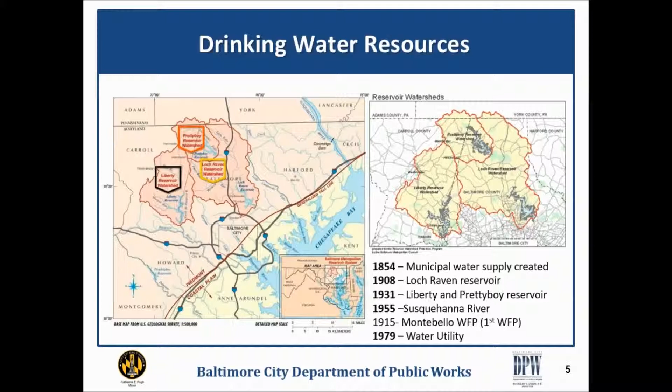For our wastewater collection system, just like in the drinking water, our service area extends out into the county. We have 2 wastewater treatment plants, both located right on the water's edge, so we are rather mindful of sea level rise and inundation from tidal surges. The 2 wastewater treatment plants are 2 of the largest in the state.

Just like on the drinking water side, the management of wastewater has been going on for over 100 years in the city. A major part of the collection system was constructed in the early 1900s, and the bulk of that system was finished in the 1950s. So a lot of the pipe material used is already getting past its projected life cycle.

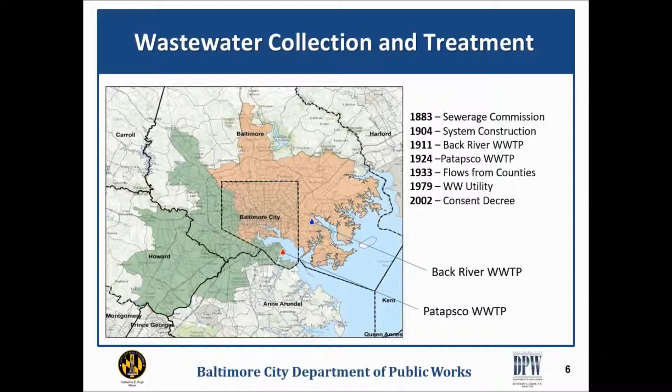Just like the water utility, the wastewater utility was created in 1979, and in 2002 Baltimore City was one of the first separated systems to get a consent decree related to sanitary sewer overflows. Those sanitary sewer overflows were a result of wet weather conditions when inflow and infiltration into the pipes became too much, resulting in an overflow from the system, causing a potential risk to public health and safety.

Then on the stormwater side, we as the city are only responsible for the stormwater system that is within the city boundaries.

However, we share watersheds with our surrounding counties. And it gets a little bit strange because then our regulations, in the form of an MS4 permit—MS4 standing for Municipal Separate Storm Sewer System—are set up by geopolitical boundaries, but the watersheds don't work that way. So we have to do a lot of our planning in concert with our surrounding counties to make sure we're going to get to an ultimate goal of water improvement.

The first MS4 permit was in the mid-90s, and then around 2008, and then going into 2010, we were looking at the Chesapeake Bay TMDL as part of a presidential executive order. This TMDL was really focused on nutrients and sediment to improve the quality of water in the Chesapeake Bay. Why I point out 2010 is that was the year Maryland put out their Phase 2 TMDL implementation plan, and that impacted the MS4 permit significantly. The regulations ramped up very much for regulated stormwater.

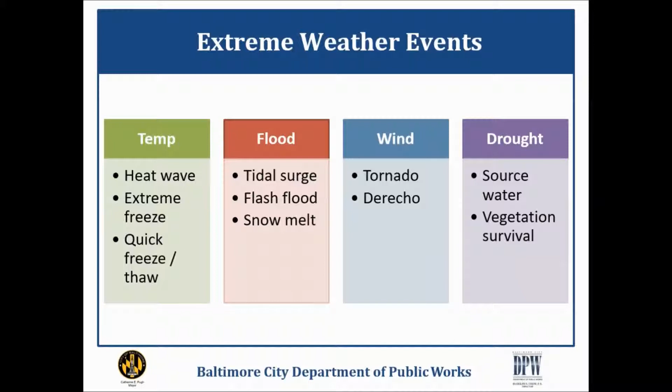So let's talk about floods. The city does have a flood alert system, and those are all the gauges shown here on the map. Our system is an online, real-time system. We're also able to tie into USGS gauges and gauges maintained by NOAA. The systems include both stream level gauges as well as rain gauges.

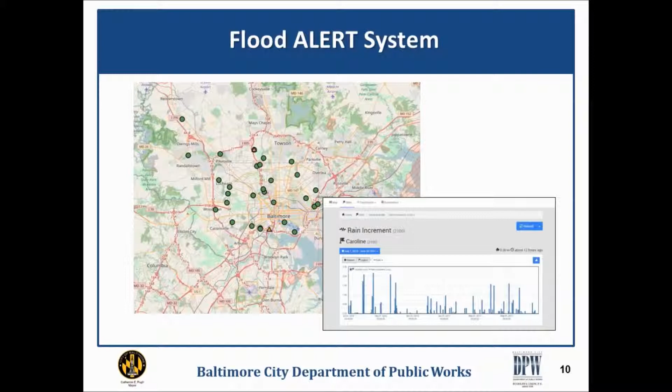Over the years we've had this, we've started to notice variation even within the confines of the city in what a typical rainstorm can look like. You can have half an inch at this location and 2 inches up here. So it's a good thing to have so many gauges and see that variation, rather than depending on just one national gauge, to get an idea of what the rainstorms and cells may be doing during a short period.

So these are some of the typical effects of storm events, and this isn't just for Baltimore City - I'm sure everyone has something similar. I think I saw some for Miami earlier. It obviously affects a lot of our transportation. The middle picture here is our I-83, the Jones Falls Expressway, and when you reduce the number of lanes that can be used, an expressway no longer has any meaning.

But we also see the potential for flooding over bridges, and sometimes - this photo on the right - this is a drift catcher. One of our major streams is the Jones Falls, and for a large portion of the city it's an open channel, then it comes into a tunnel as you get into the downtown area. This drift catcher, which is nothing but a large set of concrete columns, is set upstream of the tunnel so you can catch most of the large driftwood before it goes into the tunnel, where it would be harder to displace and unclog.

Look real close right here - to give you a sense of scale, this is a large dumpster. This dumpster flowed into the Jones Falls during a major July storm, and along with all this debris, it came up against the drift catcher and started to create a dam, which then builds up ahead. We've been mindful and conscious of trying to clean up this drift catcher on a regular basis, because if not, we've experienced as much as a 6-foot difference in the Jones Falls just because of this damming effect.

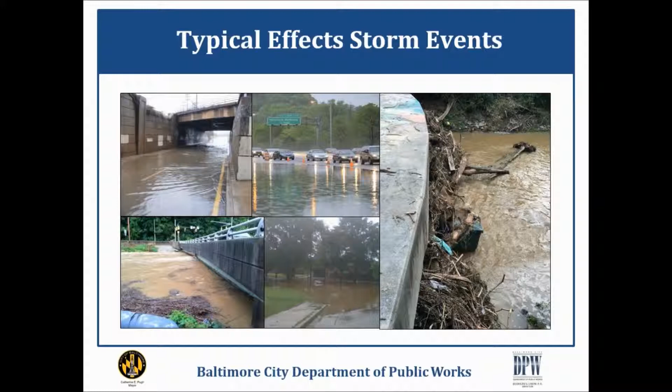And while we have had some evacuations, this was one of the largest ones. We had to evacuate 23 people, but more importantly, this was out of a public housing unit.

So talking about the storm, sometimes when we're looking at models and what we need to do, we will use that standard design storm of a 24-hour storm. And if you look at some of the storm events in the last 3 years that we've had, at the end of the 24 hours, they've only resulted in maybe 1.5 to 2 inches. Looking at it, it may only be a 1 to 2 year storm.

But when you take a closer look and see how the storm is behaving within the first 30 minutes, you'll see that it is actually more intense than even a 100-year storm. This particular one right here was on July 30th, 2016.

If that date seems remarkable to anyone, it was the date that a neighboring community of ours, Ellicott City, made national news because they received 6 inches of rain in 2 hours. That's that same storm. We were fortunate enough to only end up having 2.5 inches, but you could see that same intensity was there in the first 30 minutes. And when we look at roadway flooding, it's that intensity in the first 30 minutes that can make a significant difference related to public safety.

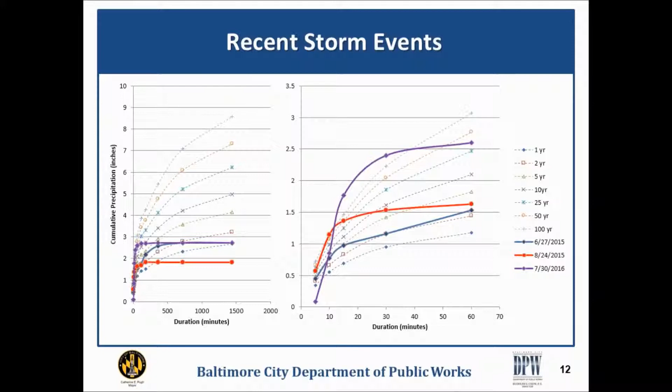The collapse had at first been seen as a small sinkhole that had gone all the way down. We were able to stabilize it and backfill it enough until we were able to get the materials mobilized to make a permanent fix.

Then came a certain summer storm. It wasn't that remarkable, about 2.5 inches in 24 hours. But it carried enough energy so that all that water coming down that 10-foot tunnel pushed out any of the debris that was in it and carried everything with it. And so this large collapse from a 4-lane road happened within 2 hours.

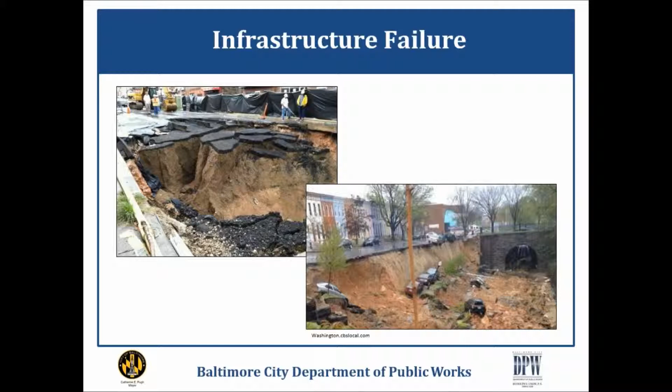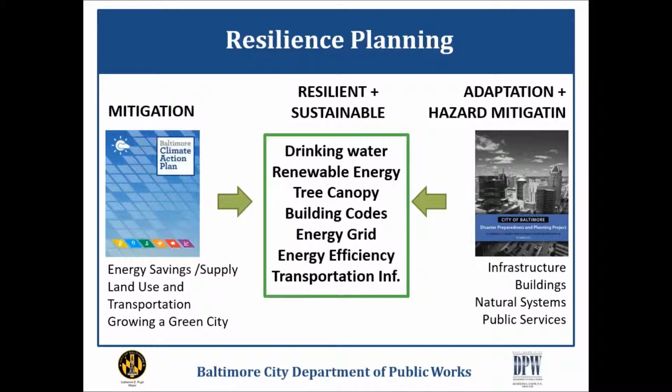So in 2013, almost as timely for this, the Baltimore City Department of Planning, specifically the Office of Sustainability, created the Disaster Preparedness and Planning Project. Because that sounds like a mouthful, we just refer to it as DP3. Earlier, that same office had created a climate action plan that was a little bit of a generic goal-setting, thinking through mitigation. Now we had DP3, which was the first of its kind because it matched adaptation with hazard mitigation, and it focused on all of these areas here in the middle.

The plan was developed similar to what you've seen in other hazard mitigation plans. You identify where the hazards are, you do a risk assessment looking at those vulnerabilities and impacts, and then you develop a plan. This plan though, was no small plan. It had over 50 strategies, and those strategies were broken down into 237 actions.

In the development of this plan, several agencies that would then be assigned as the lead agency participated in developing the plan, in addition to community members. This was a very grassroots type of plan development. In the end, the Department of Public Works had the pleasure of being assigned 49 of those 237 actions in that plan.

Currently, the city is... excuse me one minute.

Currently, the city is in the process of updating our DP3. So if anyone is interested, the results will be online this summer.

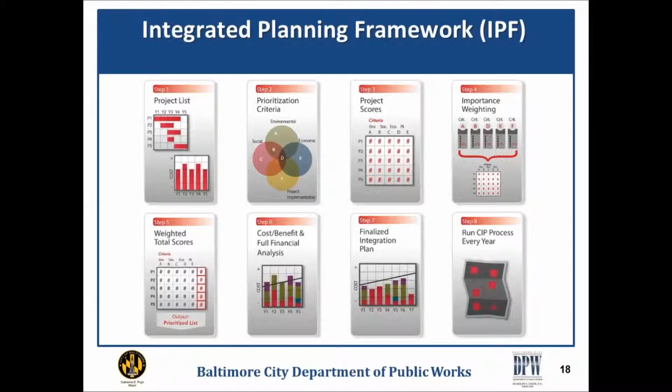So looking at that criteria and what the quadruple bottom line looks like, environmental, social, and economic factors are in there, but we also look at project implementation. As much as possible, we try to look at criteria that could be applicable to all three of our systems and their related treatment plants, but recognizing that there are some things we could never quite get there. I do want to point out that when we look at drinking water, a lot of the criteria don't necessarily fall into environmental. They are much more of a social issue that we look at.

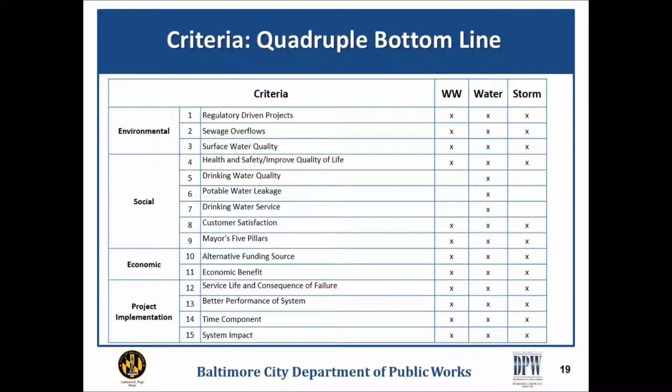This is our modified criteria that we've just done. It's a little different than what we submitted to EPA in 2013. You'll notice flooding is not explicitly on the list, though it's somewhat there in the health and safety and quality of life criteria. One of the things we wanted to do in evaluating these projects was use objective methodologies in assigning scores, and the reality is that for flooding, it was still too intangible for us to make it a specific criteria.

Another thing we try to look at with infrastructure improvements is recognizing that we're thinking outside the pipe. We're not just thinking about the storm sewer by itself, because there's a zone of influence that can happen, like the picture I showed earlier of the Monument Street collapse, where a large sinkhole formed.

During that whole event, when the first collapse happened, initially it was just over this pipe. But as more and more soil eroded, the water main became susceptible and it broke, which meant a lot of water pressure coming out, not up but out, which eventually eroded this area and led to a sanitary sewer collapse. That all happened within a very short amount of time.

So when we're looking at our improvements, we try to look at all three pipes in any of the alignments. If a water main is going to be replaced—and we're on track replacing our water mains at a rate of 15 miles per year—we also want to see if there's any sanitary sewer or storm sewer improvement needed at the same time. We're trying to think beyond water too, to see if Baltimore Gas and Electric may need to do improvements as well.

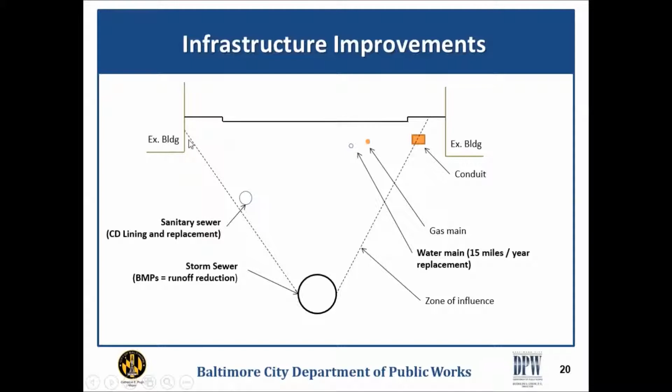We're also trying to take a longer view, especially related to regulations. A lot of what we've had to do for the consent decree relates to inflow and infiltration reduction on our sanitary sewer pipes. Since sanitary sewer pipes are primarily gravity-fed, they follow the lowest lay of the land, so they're laid out in a lot of our stream beds and floodplains.

As we decrease the potential for base flow of the stream to enter the sanitary sewer—and we've seen a lot of evidence that our sanitary sewers are carrying that base flow—as we prevent that infiltration, there's a potential that the base flow within the stream could increase. So when looking at what a flood model could look like, we want that to be a consideration of the changes happening with base flow.

On the flip side, with the installation of so many best management practices for the MS4 permit, not only within the city but also the surrounding counties, that could play into runoff reduction, because you're going to have greater infiltration into the groundwater and a runoff reduction, which could impact how much water is coming into our reservoirs up in the counties.

So last, we got to look at external opportunities. For over 100 years, Baltimore City has been operating like a municipal water service operator. That is public use of it, and public stays public, private stays private. And we build up this wall a lot. But we recognize that for any type of sustainability or resiliency, we've got to bring that wall down.

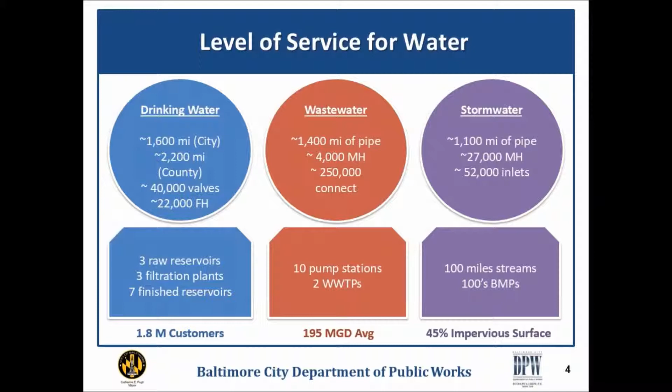So the other part of the reality is when we look at private land, our downtown area is almost paved, curb to curb paved. There's not a lot of green space. If you recall from one of the first slides, I'll come up here. Where we do have green, it's along our major park areas. So there's large swaths of green, and that's where it's consolidated. So if you were to compare the city's impervious area to the total area, it's about 45%. But the reality is those pervious areas are very consolidated into those parks.

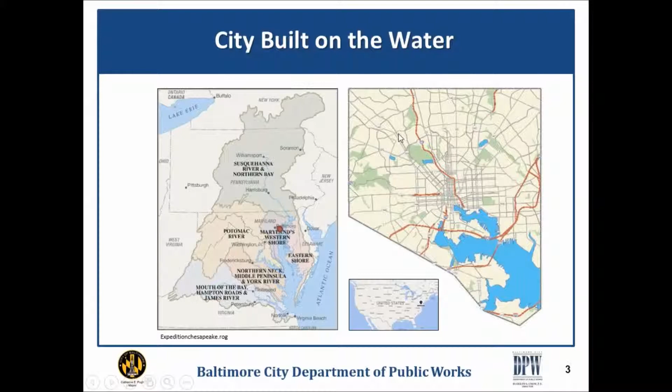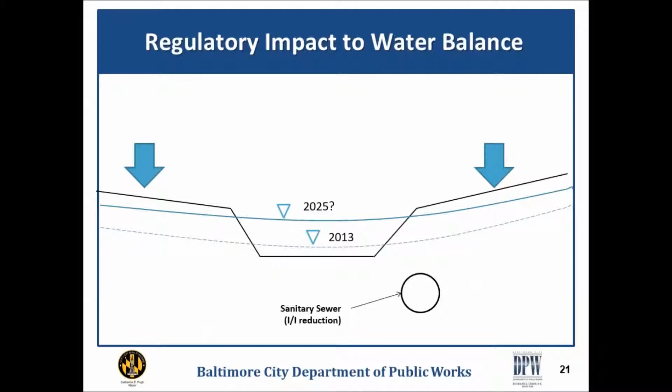So for us, to move forward, we do have development regulations that require more related to stormwater management as well as floodplain mitigation if they are within the floodplain. But in addition to that, we are looking at pay-for-performance models that we've seen in the surrounding counties, where a contractor will do a design-build project and provide it for a certain cost, but access the private property that the city would otherwise not be able to easily do. And then the city, in the model that we're looking at - this is Anne Arundel County - would then take over maintenance of that practice through an easement.

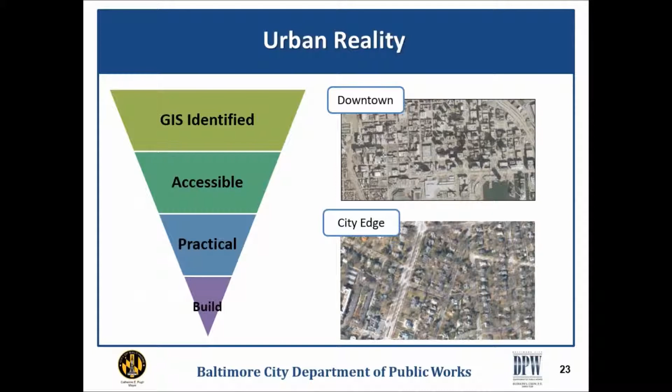Another thing that we are looking at is just how we can create incentives for more private green space installations, both on private land as well as in vacant lots. Not all vacant lots are publicly owned. They are privately owned. So private nonprofit organizations tend to have a little bit more access to those types of lots than the city would.

So this past spring, the City of Baltimore Department of Public Works, through a grant from the U.S. Forest Service, was able to create these GROW Center pop-ups. The idea behind the GROW Centers is green resources and outreach for water. It provides materials, building materials, education, and training to community members so that they are better able to install some of these green practices, including stormwater best management practices.

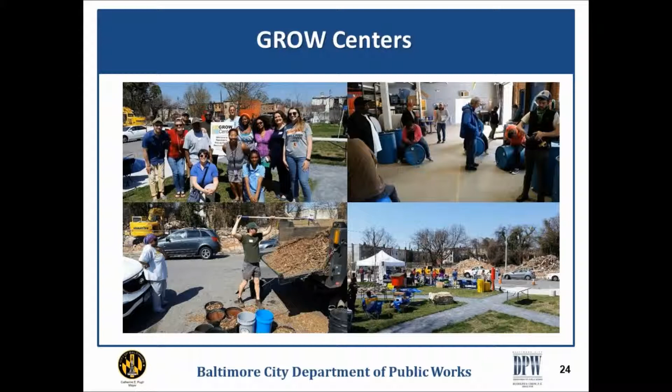This is one of the incentives we're trying to look at, above and beyond just doing grants, so that community members who typically don't feel any connection to water can start doing more things on their properties to improve not only the water but also the air quality. And along the way, they get a little bit of education about things related to extreme weather events.

Going forward, DPW is looking at what we can do to maintain and sustain our drinking water sources. A lot of this is related to our reservoir protection. Even though we have a lot of land and some great buffers, the forest condition around there has started to degrade, so we recognize that some maintenance and improvements to those forest buffers are going to be needed.

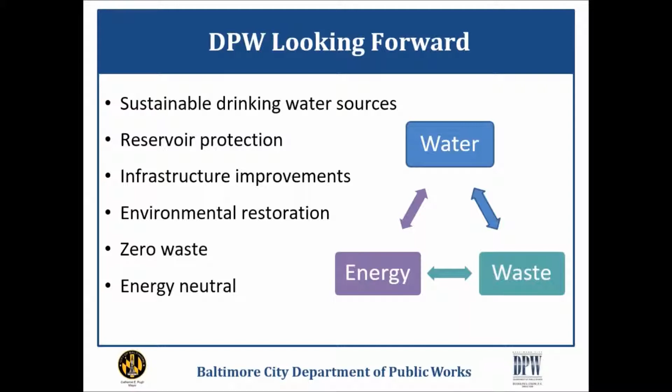The infrastructure improvements I talked about before are going to be coupled with environmental restoration. Along the way, especially with the larger projects we're working on, we're starting to look at what this will mean related to energy neutrality and zero waste, because we think the water-to-waste-to-energy nexus is the way we're going to be sustainable and resilient for the future. So thank you very much for your time, and I'm open for any questions.

Wonderful. Thanks, Kim. I know from personal experience, I am a sucker for free mulch, so good work on that one. Right.